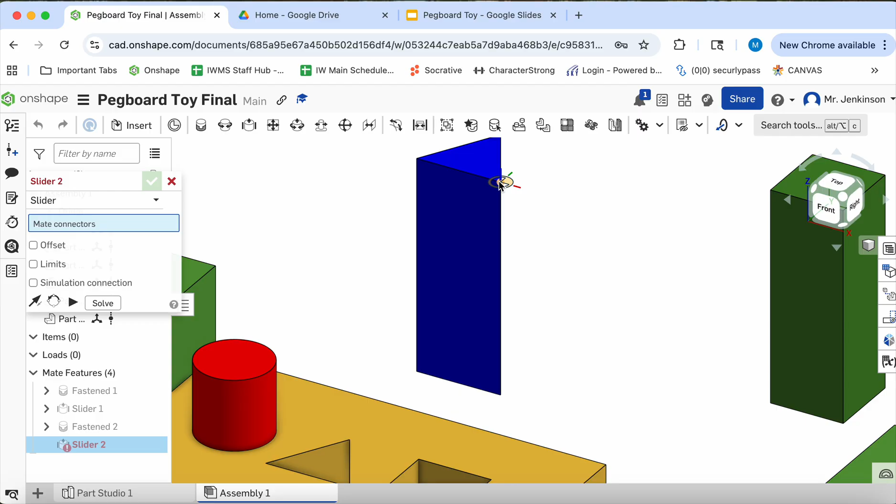So let's go ahead and go to this slider mate, and let's zoom in. So if I roll the mouse wheel, I can zoom in, and I want this corner, and notice the orientation of the circle, it's flat. So I'm going to select that for my first position, and then I want to select this corner of the triangular cutout, and then click the green check mark.

I'm going to hit escape to end that, and I should be able to move this right here. Now again, if I look at like the front view, these aren't even, so I want those to be even. So I'm going to add a fastened mate, and this time it's going to be the top. And again, I'm going to use the same thing. So like this corner

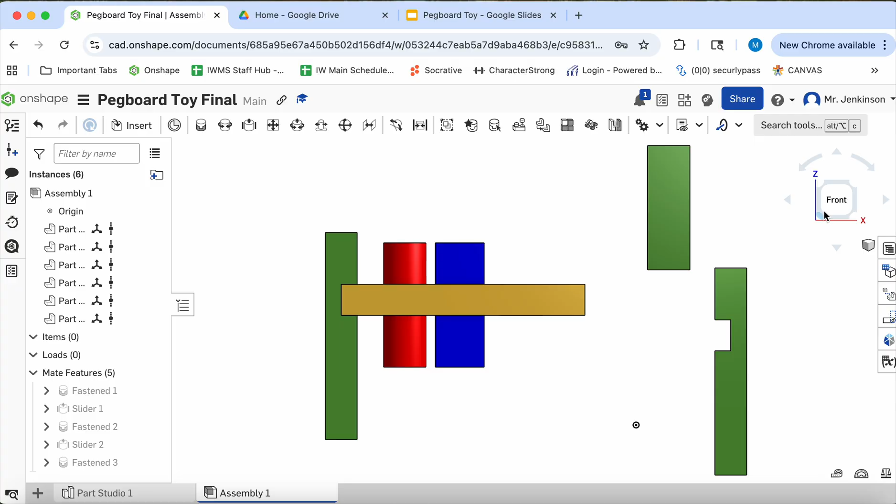and this corner, but I'm going to place a 1-inch offset on the z-axis. So this is going to say 1 inch. Click the green check mark, and now these are even. If I click the front view, you can see that they're going to be even.

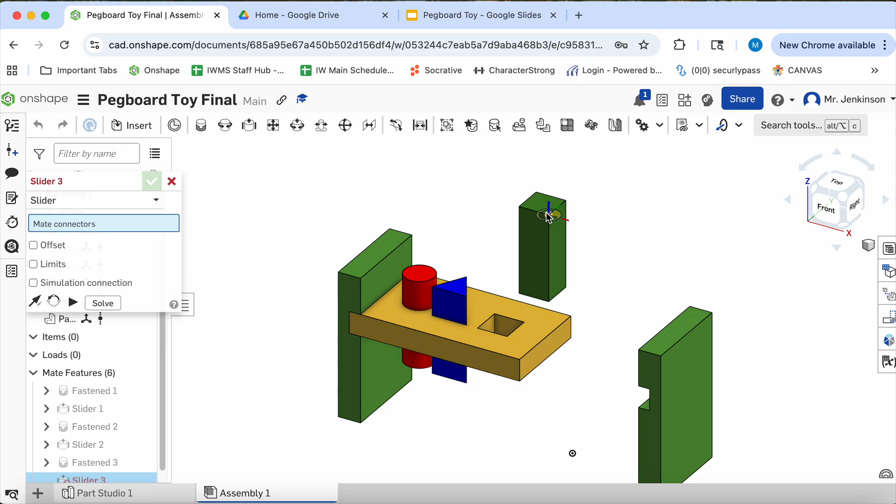All right, then let's hit escape to end that command, and let's move the square peg over. Let's do the same thing with that. So let's do a slider mate. There's a lot of different ways you could do this. I'm going to get the corner. Oops, didn't quite take, there we go. For my first point, and then this corner for the second point.

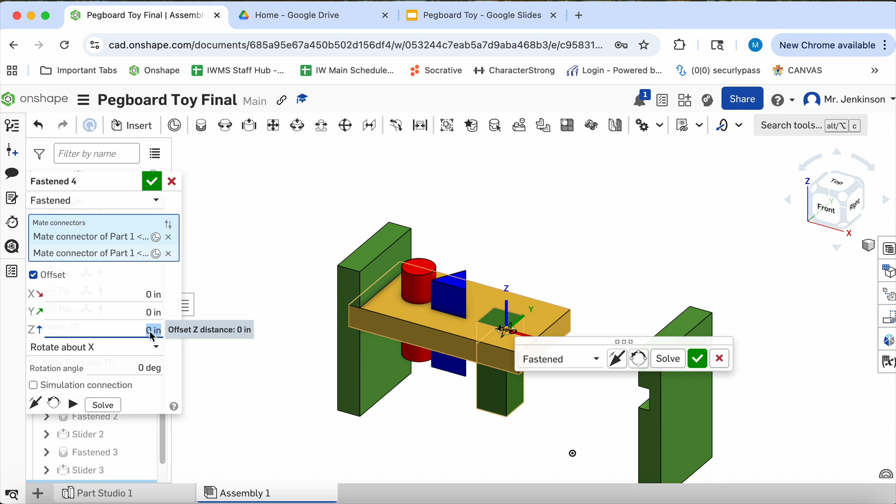And then let's go ahead and click that, hit escape. Can move this, it works fine. And then let's go ahead and place one more mate on that, just to get that even look, the 1-inch offset. And click the green check mark.

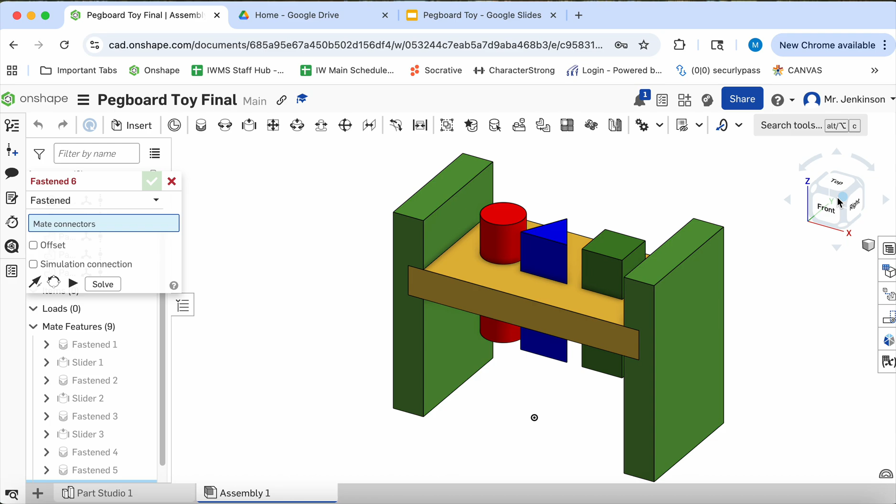All right, and then for the last step, let's go ahead and attach this leg, this support. And so we're going to do a fastened mate, and maybe if I do this corner, I could go to this corner, and that works. Now let's end the fastening command, hit escape a couple times.

Just select parts, make sure nothing moves so it's all locked in position. And that's it.